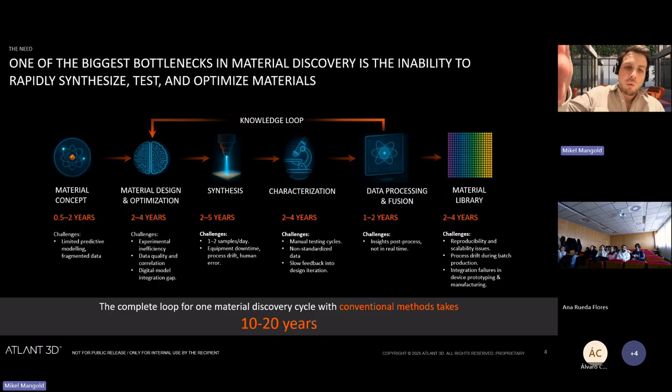So here you can see that this is a little bit how it is today, right? It's just what I just said, that you have different steps along the way until you're able to bring that to the market. And the other trend that you have right now, and I don't know if this is a topic you deal with, but it's the whole AI material discovery.

And actually just a couple of days ago, the US White House signed an executive order for the project Genesis, and you can Google it. And it's basically that the US wants to now leverage AI for scientific breakthroughs in material science. It's not just the US, it's a global phenomenon, and that's now available because of LLMs. So it's a couple of years old. And now we want to say, well, how can we use it for developing new materials?

So many companies raised a lot of money, hundreds of millions for AI and algorithms, but actually they cannot print it. They cannot quickly test it because they are limited still by the current existing methods. So with our machine, which I will explain in more detail in a second, you can basically go almost to the molecule, the nano layer level, and the shape and the size and gradients, whatever, you can basically print whatever the AI tells you.

And for the AI material discovery aspect, we are really bridging the gap between the software layer or the algorithmic layer to the physical world, because other machines are struggling, they're limited in capabilities for the design and the testing.

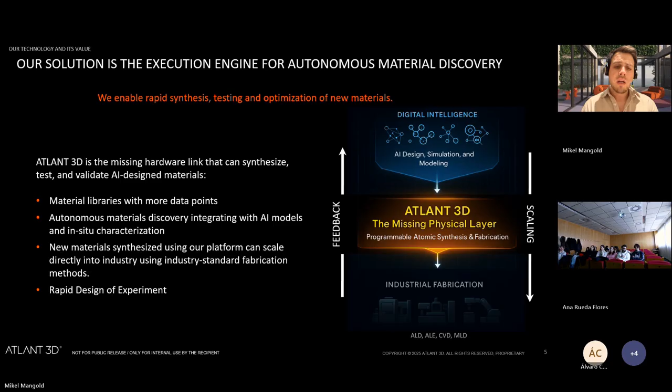Now, we just talked about DALP. So the founders were working actively with atomic layer deposition, and they were frustrated that you had to wait on the chambers to be filled with excess gas, and then you go to the next chamber, you purge, and then you introduce the next layer. And this is basically how it was in the other ALD machines. Now, and I will actually show you, this slide is a bit better.

And that design is enabling us to come close to a surface. You bring that nozzle, you heat the substrate, and then you can locally deposit platinum, titanium oxides, other dielectrics on the surface, and you don't need lithography, you don't need etching, you don't need any of that.

So you can imagine other applications for material discovery. You can deposit very quickly 200 different shapes or sizes or even material compositions, and very quickly you can test them. And that was not even feasible before.

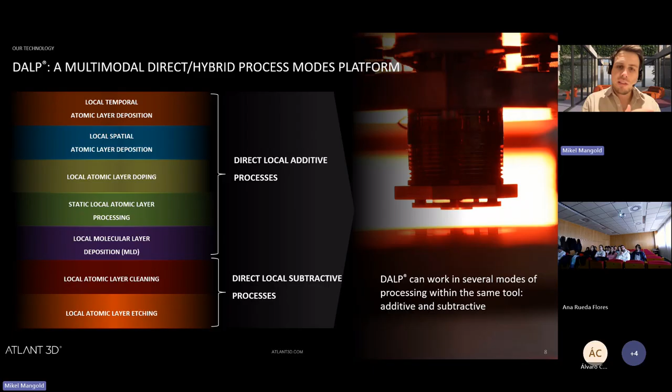I will continue. So it is a nozzle, and the promise of that is not just for deposition. There is potential for etching as well. There is potential for cleaning as well, because basically we use an ALD precursor, which is a liquid, and then it comes as a gas. So we can use gases, put the nozzle with the gas, and do certain applications such as etching, such as deposition. So it's really a multifaceted tool where you can test a lot of different things.

And this is not just a couple of characteristics; potentially we can use more than 450 different materials. And the reason for that is because we can use all the potential ALD precursors.

Right now, we can deposit from room temperature to 350 degrees. We have obviously a gas flow. We can basically fully control the way the nozzle works. So we developed a software that can completely program what the nozzle does. And we have an optical system to measure that.

We can fully control the thickness. We can fully control the shapes and the patterns, and we can control the distance, of course, from the surface. So if we put the nozzle close, we're gonna get ALD, and actually if you put it a little bit higher, you will get some kind of CVD deposition. So we can even modulate that. Yes, and things like this.

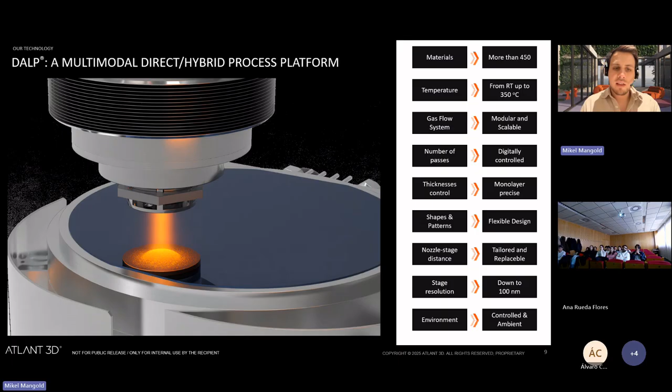So this is how it works. This is a little bit the process. So people can design what they want to do. They fill the materials in the machine, in the bubblers. Then they're gonna put the samples in the machine. They're gonna define the parameters, what they want. We do a simulation on the software. It's gonna tell you, well, to get such results, you need to do this and this deposition.

Then you launch the job, and then basically overnight, you come back the next day, and you have 200 data points of different materials, of different compositions, on one single wafer in one single step.

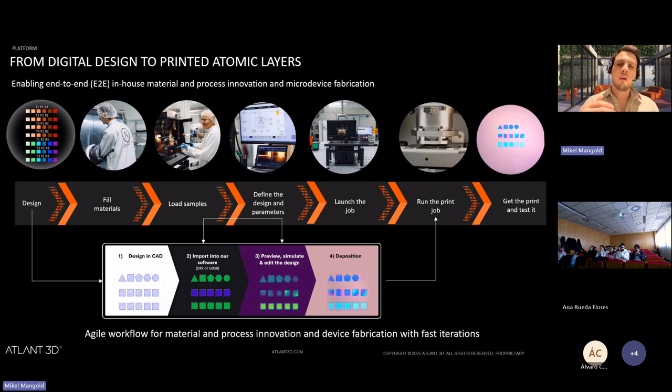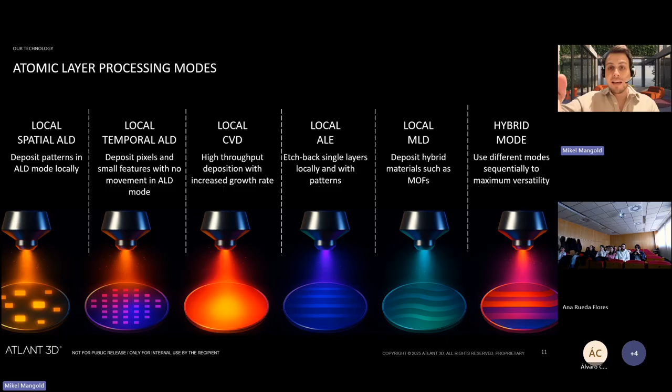So this is not just, again, what I said before. That has all the different opportunities, the way we can deposit. We can do etching and molecular layer deposition, or even a mixture of both. So we can do deposition and then right after a cleaning or etching step. So you can basically, I think actually that's the next slide.

So you can see in the example of ALE and ALD here in the middle, we can deposit, and then if we want to do a little trench, we can then switch it to ALE mode and make a trench. And as you know, before, to do that, you had to fully coat the wafer, and then you had to put it in another machine for the etching step. We can do it right away.

Because we can control the different materials, you can create doping layers and fully control the stoichiometry. That is also something almost not feasible before. So that's what we can do. So we can stack material and dope material, and control that with predictability.

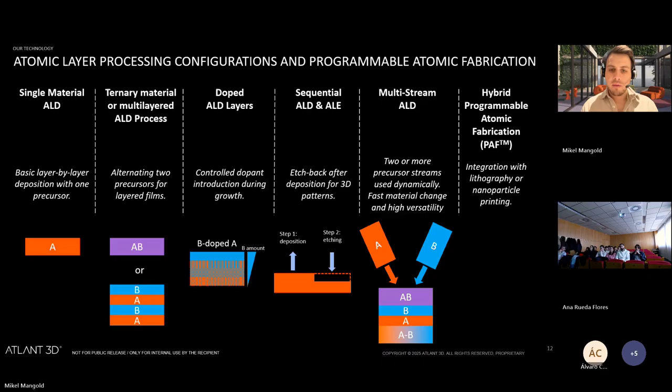So now it comes to the resolution perspective. I don't know if you know, but obviously we can potentially target all the applications in the world that require material science. However, we're still limited by the size. So we cannot go yet into making chips directly because they ask us to print nanometer layers. We cannot do nanometer line deposition because that is extremely difficult in terms of gas physics. However, there's a chance we succeed at that in the future.

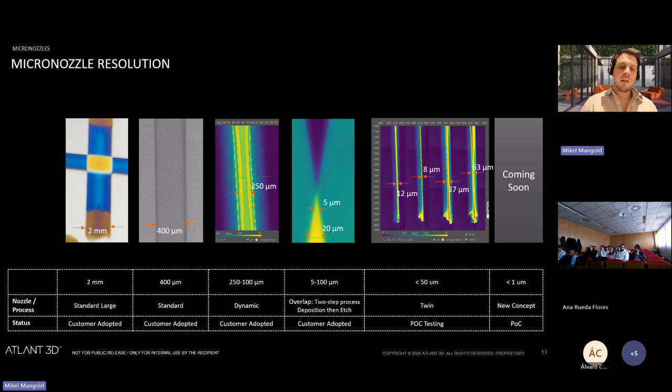But we can do super well at the moment 250 microns, 400 microns, which is applicable to a number of applications like sensors, protective layers on certain materials, on MEMS. We now have optical application requests for defense and beyond, where we developed a nozzle for 2 millimeter passes, and then we can coat, for instance, a certain area to have a certain refractive index, or we can go lower, as you can see, down to 8 micrometers. And that was basically a deposition and an etching step of the line to get such small lines. So that's what we did.

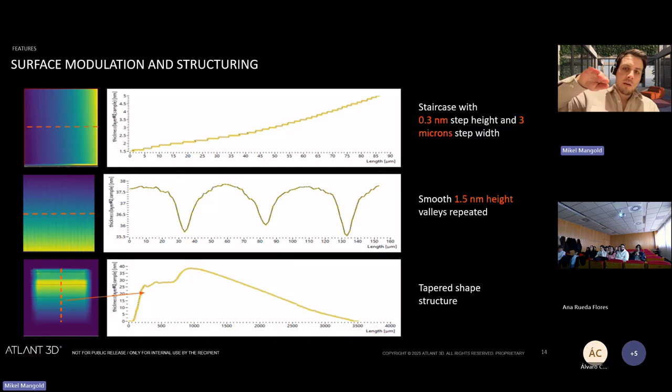And the great thing with our tool is that we can control stoichiometry, we can control the pattern, but we can also fully control the thickness. So because we can fully control the thickness, we can create almost perfect gradients, like 0.3 nanometers at a time, or we can even create valleys of material, as you can see. So we can completely control that.

So now, how do we control that? It's because it's like a pen that we bring to the surface. So we just need to come multiple times with the pen, and then you do many passes.

So if we just want a small amount, then you just do 1 or 2 passes. And if you want a higher one, then you will do multiple passes with the nozzle. And this is how we get the different thickness.

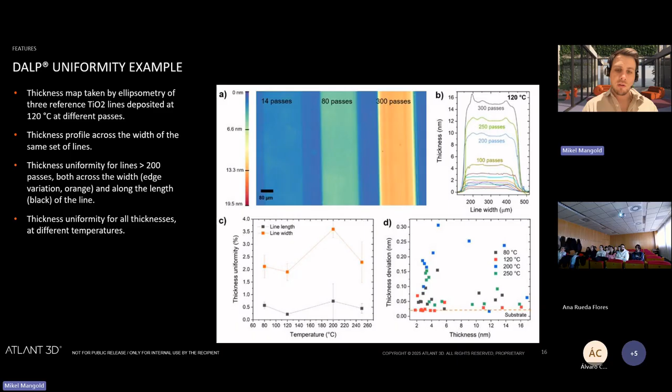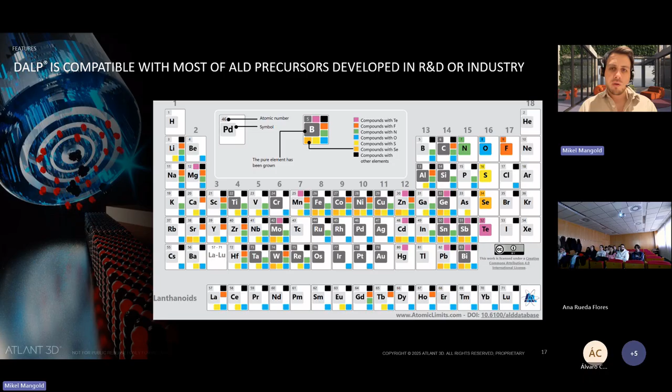Great. Now, in terms of material, as I mentioned, up to 450 materials, and it comes from this table, which maybe you know as well. It's called AtomicLimits.com, where you can find all the different ALD precursors. For each material, however, we need to develop recipes. So we need to adapt a little bit the pressure, the gas, the temperature until we find the right recipes for deposition.

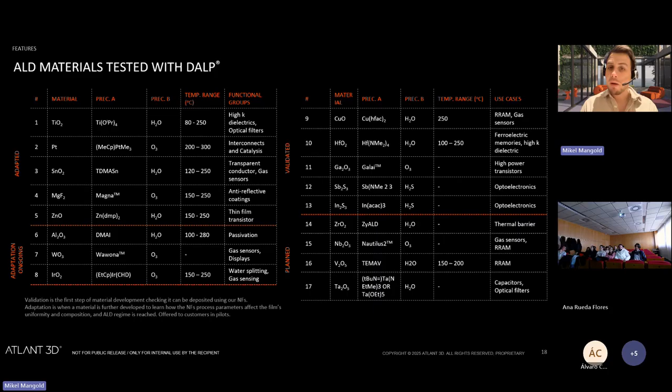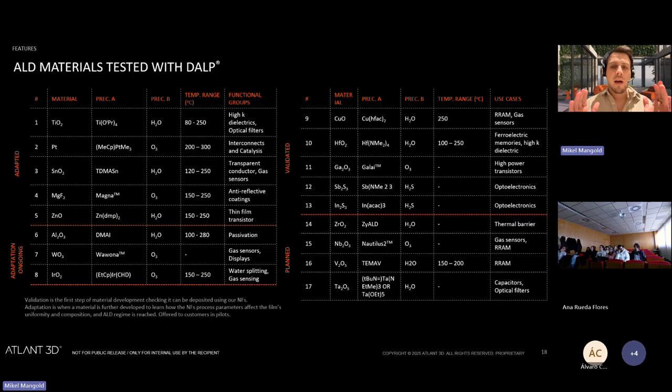And this is why nowadays there are 5, 6 fully developed recipes that work really well, like titanium oxide, zinc oxide, magnesium fluoride, platinum. So that's why we develop use cases now in sensors and in catalysis and so on, because these materials work really well now. But we're developing many others that you can see here. And the main reason that sometimes they are challenging is because today we are still working in complete ambient environments, like an open chamber. And because of this, we cannot work yet with nitrides, sulfides, and so on.

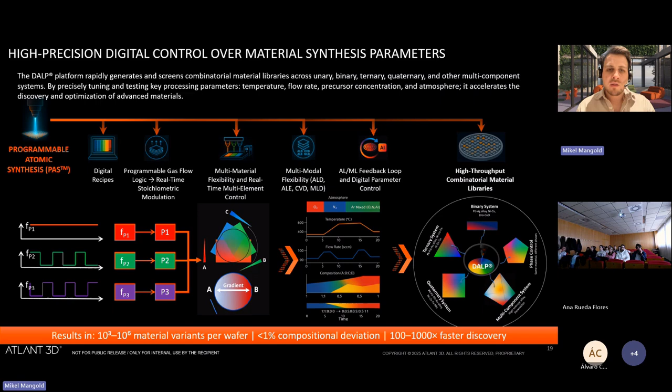So how do we control the stoichiometry? So here's an example. As I mentioned, we have a bubbler of liquid with ALD precursor, and then we make them come as a gas, and we can control how the gas is pumped into the nozzle. And by doing so, we can fully control the system and the stoichiometry. And then we can create all the different structures, you can see here quaternary systems and so on. So this is why we can create these libraries.

And this is a slide that kind of summarizes what we do. So you can define the parameters and the material. Here's an example, I think it was like 200 different lines. In a typical clean room or lab right now, you need one wafer to do one composition. And we can now do like 200. That's the one that you see in the middle.

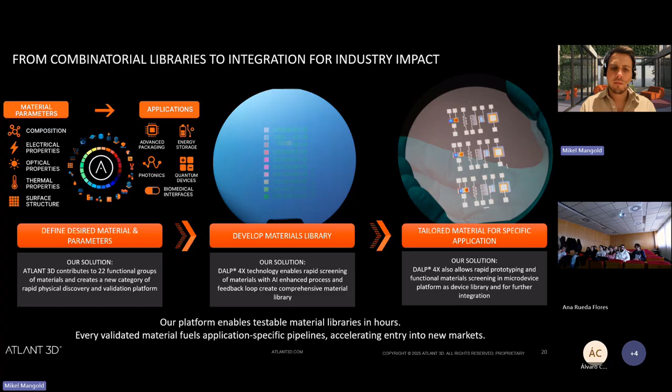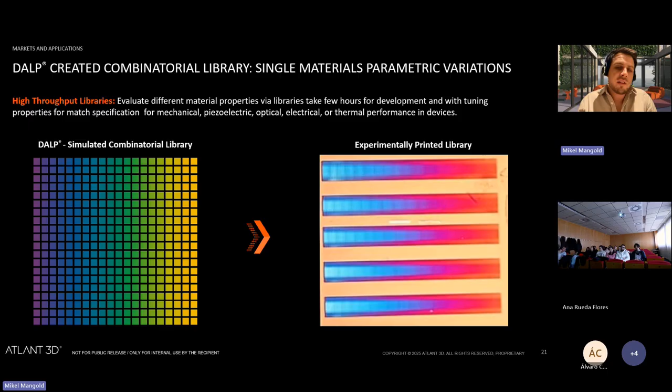Yes. So this is just one slide again to show the combinatorial material library, how it looks. So this is the simulation software, and then you can fully control the thickness, and therefore you can control the colors or different catalytic activity depending on the application, and we can measure that.

So now the great thing that is coming is that there was the old way of doing material deposition or material discovery. We had some robotics and it got a little bit better, but now with DALP you can accelerate from 1 to 2 a day or 10 to like 1,000 different depositions a day. And once we combine it with AI algorithms that recommend certain materials or compositions, this will upscale the whole thing even more. And this is why we are now establishing partnerships with AI material science firms around the world.

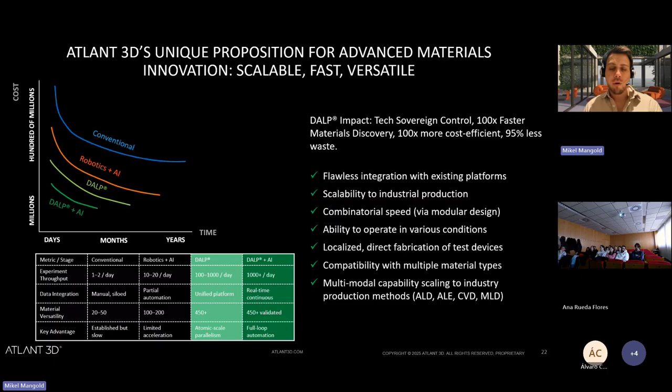So I don't know if that's so relevant to you, but I just want to show you that to commercialize such a technology, everyone wants scale and throughput. So the industry asks us, okay, but can you manufacture things? So we are working on it. This is the one that is already available. And we are now developing a tool that we can connect. It's called a cluster, where the wafer would change on its own. And because of that, you can start to have some speed and throughput.

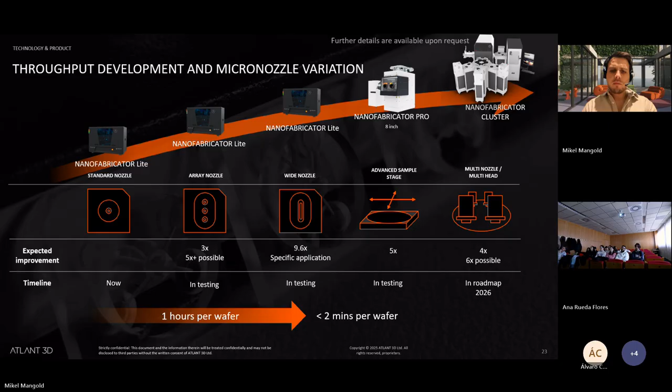And this is what we do also, as you can see on this slide, where you connect metrology equipment and different characterization or XPS equipment, all connected to the tool. So you have the wafer getting in, you get the deposition, and then you can fully characterize it. So everything will be fully automated, and material discovery will be so fast compared to the way it is today. So that's what we're working on.

I'm happy to come back to some slides and explain a little bit deeper. If you have any interest in certain areas like catalysis or even chip surgery, you can let me know, and I have specific slides just for that based on our discussions.

If someone is talking, I don't hear you. Maybe you can come to the end. This is the last? Yes. Oh, okay, sorry. No problem. Okay. But I have more slides, basically I have a million slides. So if I get some triggering, I can show some more slides based on the conversation. Yeah.

So, any questions? Our students have had several presentations about atomic layer deposition, CVD, PVD, so probably they should understand almost everything about this technology. So please, feel free to ask questions. Was there a question? I didn't hear.

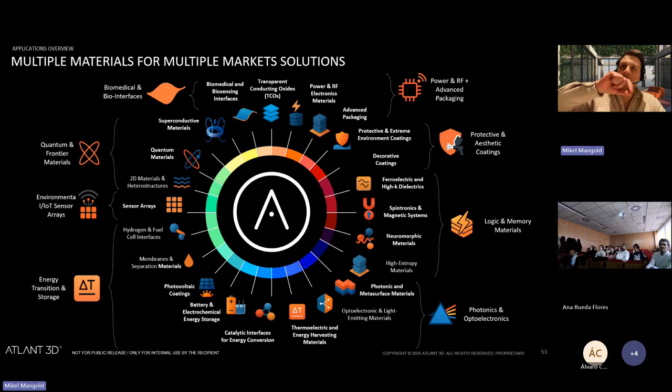So catalysis, sensors, advanced packaging, and we are now receiving as a fourth layer, I would say, a lot of requests from the quantum community, because they have very complex structures. When they need to do their quantum dots, sometimes they have some kind of nanowire coated in certain devices. So it's always a very specific design, and they struggle a lot with existing methodologies. So that's the four.

And last but not least, as I mentioned, AI material discovery, which is using the AI algorithm and testing them, which right now no one does. More questions?

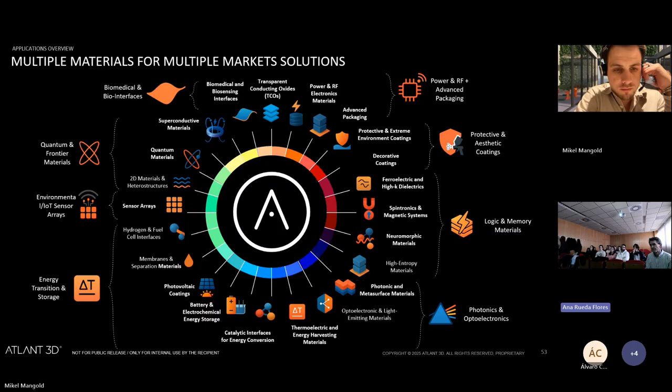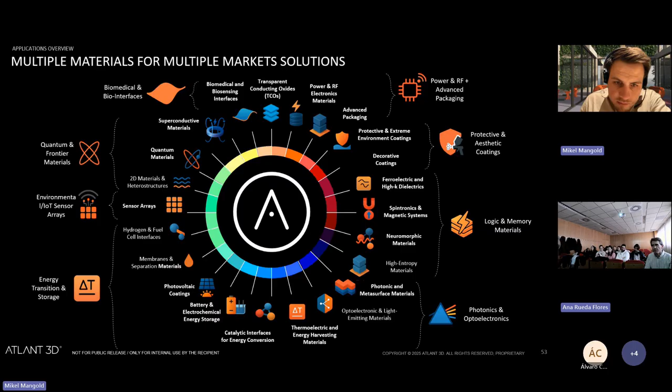I have another question. Do you expect a higher interest in this technology from companies or from universities or public research centers? Do we speak with these different institutions, you said? No, I was asking if you expect a higher interest among companies or universities. Yes, let me find you something as well. Trying to find the relevant one. Some of the applications you mentioned are very easy to become differences. Some others look like basic research. Yes.

And right now we are working on catalysis with the 2-3 biggest institutes in the US for water splitting applications, as well as some specific masking layers, and some catalysis as well. So that is what I can say verbally. So big institutes in the US, and large corporates. We have high interest from the biggest semiconductor player in Japan, because one of the things that I didn't mention, there's one slide actually that I can add as well, let me see if I find it.

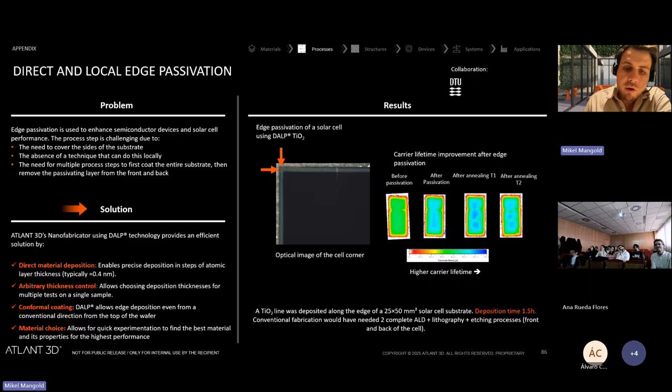So I would say the product market fit is something we're still looking at, but our release price for our tool is right now at 500,000 for the Nanofabricator Lite that you can see here. And then this one will be launched actually next week. We have, I think, some kind of demo and launch in California for this tool, and this one is around 3 million. But there is also the collaboration aspect, to develop co-IP and so on. So there is some kind of agreement that we do also with some scientific profiles.

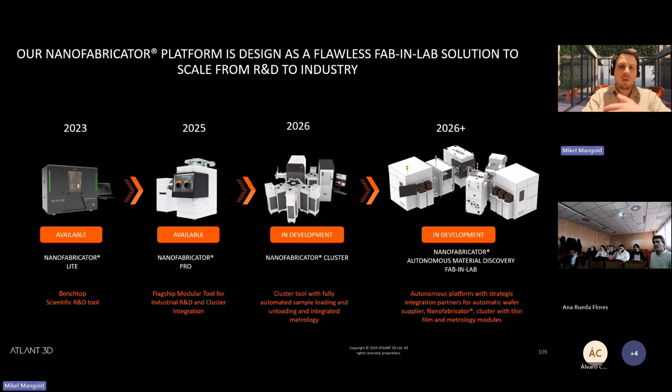Yes, I can show you a little bit more. I wanted to have this kind of interaction already in the middle, but I can share with you a couple of experiments that we've done with the tool. So let me. Of course.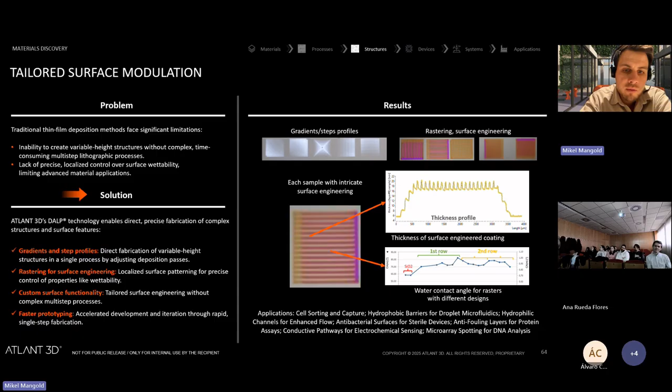If we look now at this one, as I mentioned, we can fully control the height of the deposition. So by controlling the thickness, we were able to create modulation of a surface, and that created, if I'm correct, hydrophobicity. So that is something used as a protective layer on devices, like some hydrophobic coating, and so on.

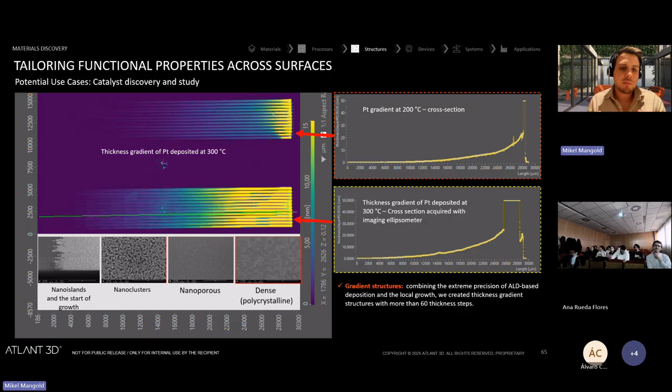This is the example of catalysis. So we were able to control the thickness, and we also obviously control the temperature. And with different depositions, we showed that we were able to control the crystallinity of the deposition. You can see here nano islands, nano clusters, and so on. So that is also something amazing. So then people, with like 200 data points, can see which one gets the crystallinity they want, with the properties they want for a certain catalytic activity.

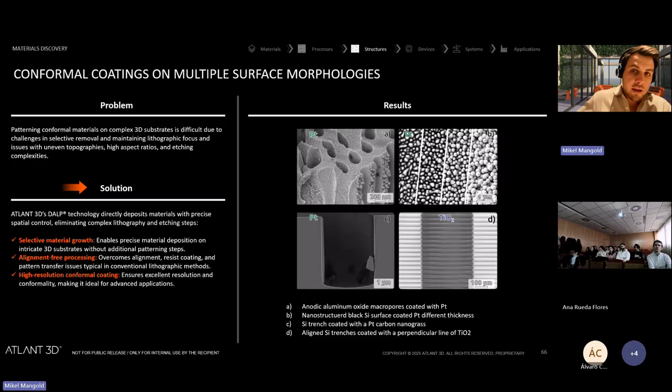This is to show that we are not so dependent on the flat substrate. So we're able to coat rugged surfaces, like a line like this, or some kind of channels. That has use cases, for instance, in bioreactor applications or biotech, or as I mentioned before, energy storage devices.

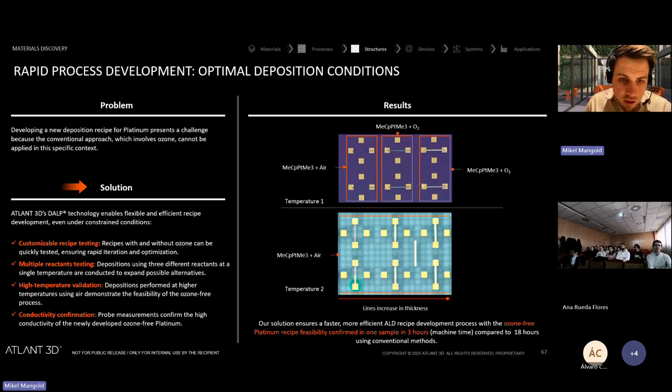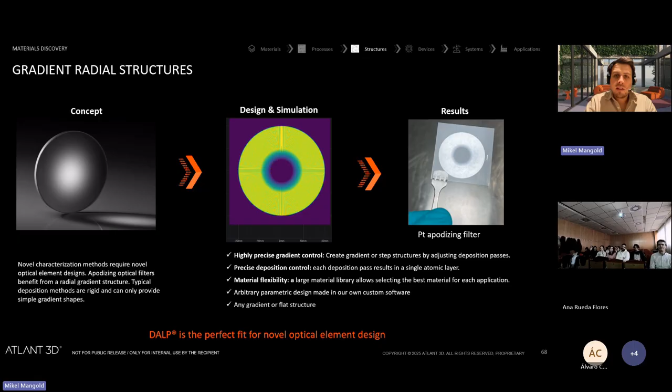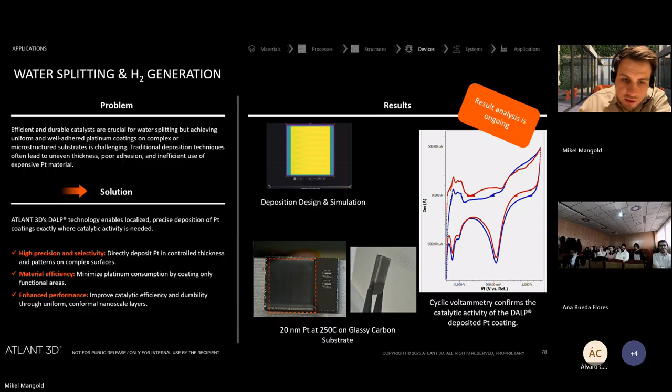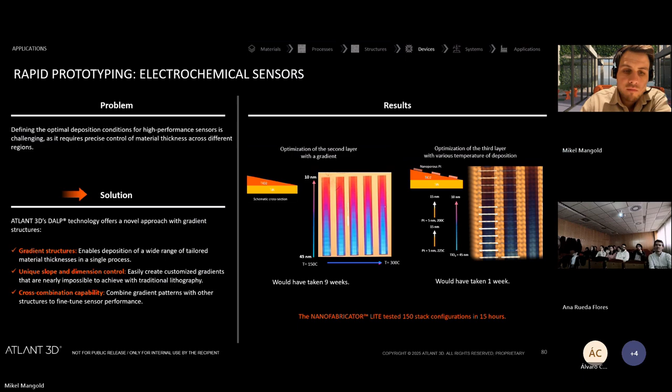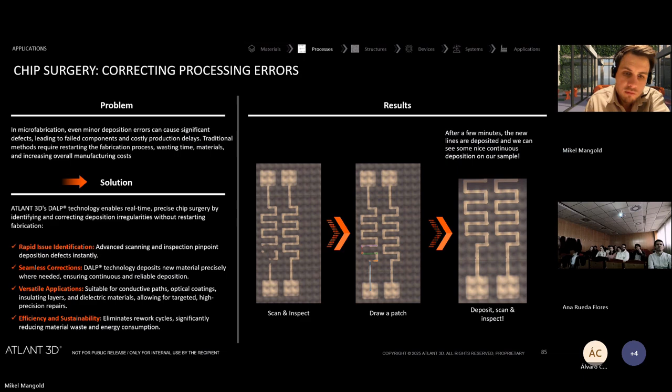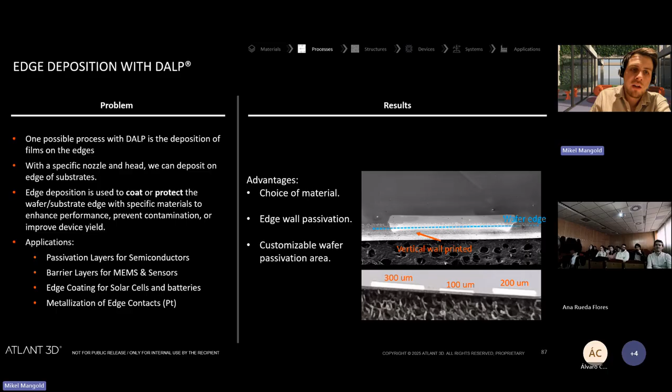And this is, I think, a protective layer. If I'm correct, it was titanium oxide, but on a MEMS device, a fully processed MEMS device with a Bragg mirror. So usually after you make the MEMS, you cannot do anything anymore. But we were able to locally coat a protective layer on the MEMS. And we did that in a collaboration with Silicon Austria Labs. And after coating it, they tested the MEMS and it was fully functional.

So that is again something that was not feasible before, and now we can, after the MEMS exists, add some kind of protective layer. Could be very important for applications where failure is not accepted, space applications, or very important automotive kind of vehicles. You don't want it to fail, so you want to make it even better.

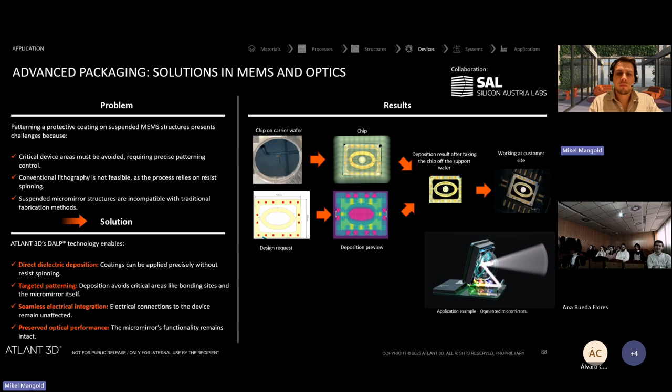We're actually working right now with luxury players from Switzerland, where we will print different colors and shapes on certain of their devices. Because today, if they want to do that with metal, they actually do multi-step PVD, and it's kind of complicated, especially if the surfaces are very small or they need to be very precise. So that's kind of where we work on.

And there's the same demand from defense, where they are asking for certain areas to be coated for having a certain reflection or kind of invisibility kind of thing. So we can control that as well. Yes. So those are kind of ideas and food for thought that you can think about.

We started to put this machine in the hands of people. So that's very new, right? A couple of months old. So we're very excited about what they do with it, because it's based on their expertise. And there's a person in Erlangen in Germany. They printed a fully functional solar cell in one step. They literally just did the full solar cell. That is something we didn't do. We didn't think about doing it, and they did it. And now in the US, they are working on new battery types and new electrodes and things like that. So yeah, possibilities are really unlimited.